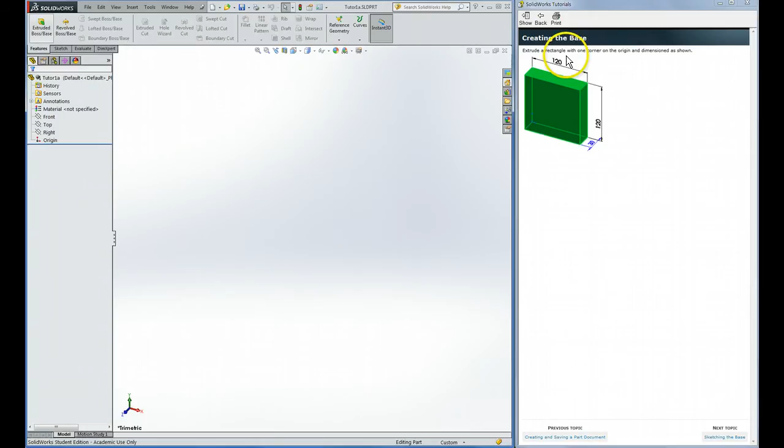So it asks us to do extrude a rectangle. If you already know how to do this, feel free to do that without following their instructions. Just go right to extruded base. That's good practice, but I'll follow the instructions.

Okay, so extruded. It asks us to click on the front plane. I'm just going to do that so I'm consistent with the rest of their instructions, but you can click on any plane to make a part. Front plane, and now we're set to that one.

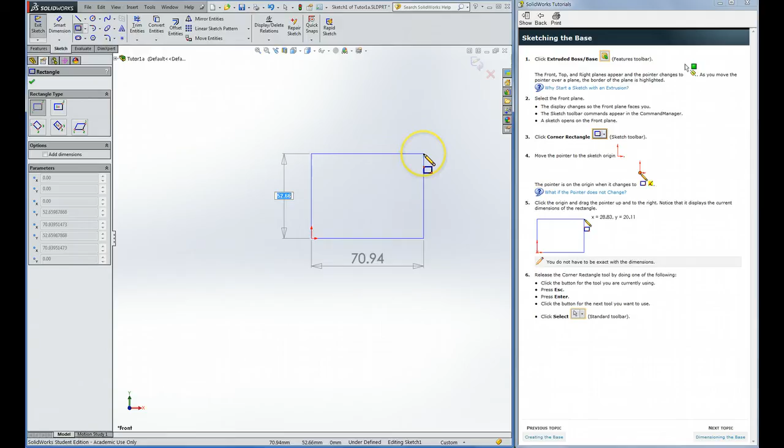Rectangles using corners. Okay, so you see the little blue, orange dot. That means it's locked on to the origin. And we'll just make any size rectangle. You can release by clicking the button on the tool you're using, press escape, that's how I usually do it, or press enter.

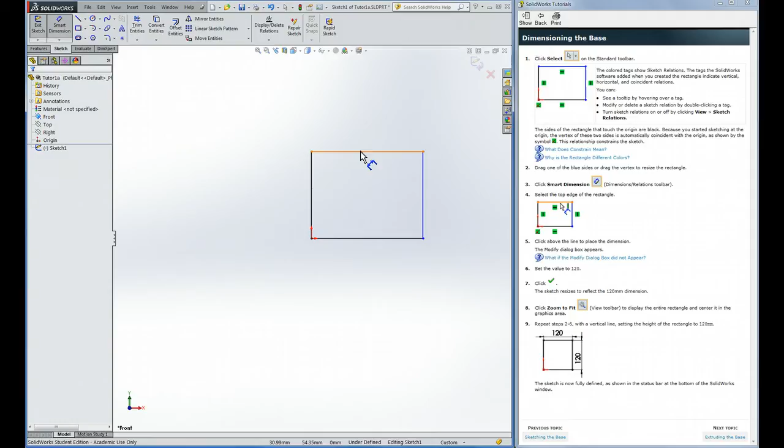Next, now we're selecting, it asks us to hit that on the standard toolbar, but it is already selected. So we're going to dimension this rectangle. I clicked Smart Dimension, and that is asked to be 120. So now I'm hitting enter instead of the green check, but it's fine to do either. It's ready to dimension another one with the mouse pointer looking like that, so I can click right there on that one. 120, enter. Now I've got my rectangle, and that's what it asks to do.

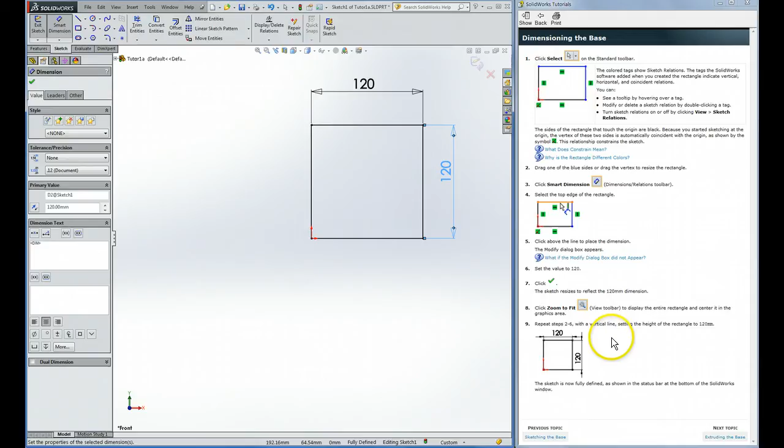Zoom to fit is often useful, that little button, or the F key. That fills the screen with it. You notice all the lines are black. That means they're fully defined. If you have blue lines, then something's not dimensioned yet.

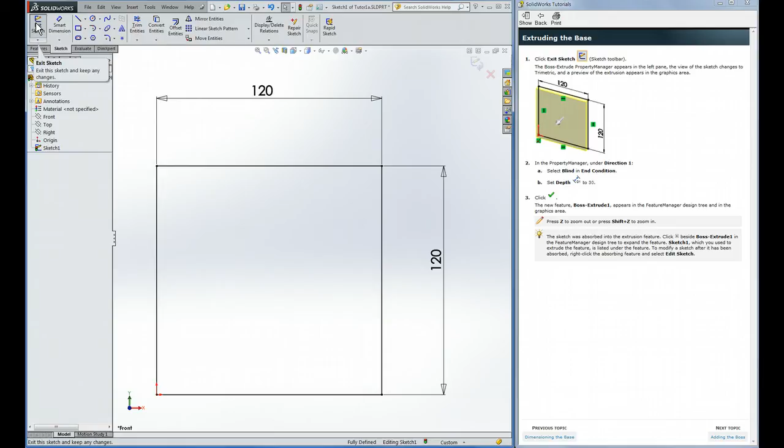Now we're going to extrude it. So we get out of the dimension. We hit the exit sketch to get out of this. And that puts us back into the boss extrude, or base or boss extrude. And now we need to set some conditions.

So first thing is the type of extrusion, or how far to go. The blind means it will just go a distance, and it won't account for any other features in the model. Often you'll do things like to a surface or mid-plane. Those are often helpful for more complex parts, but this one's just blind. And they want a depth of 30. So 30, enter, and check.

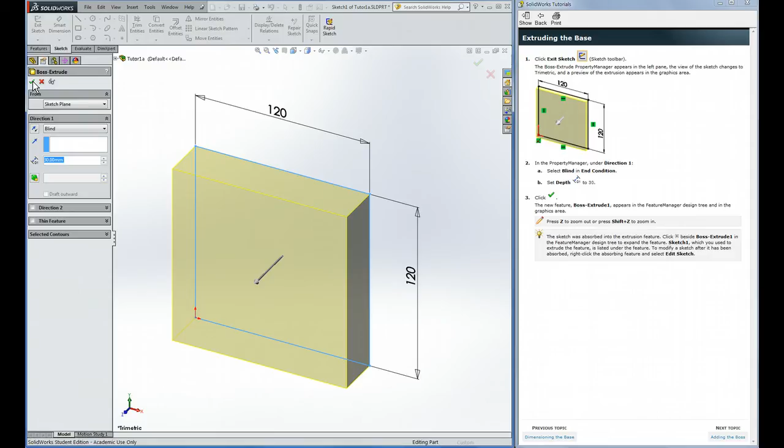Okay, it asks for Z for zooming in and out, or Shift Z, zooming in, Z for zoom out. Of course, the wheel does the same thing, the mouse wheel. Adding the boss.

Okay, so now we're going to add a boss on this base. So in terminology, usually you start with a base, and then anything that sticks out from that is called a boss. So a boss is just something that sticks out from a part.

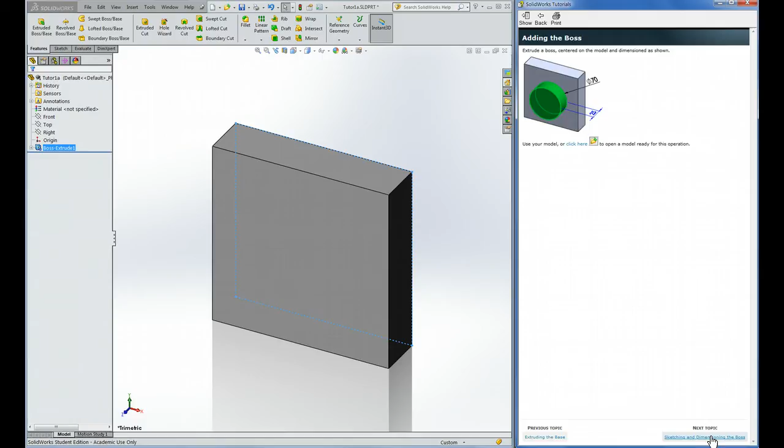Okay, extruded boss base. Now it's asking us for a plane that we want to make our sketch on. So we're going to use the front plane. Actually, they click the plane first. It doesn't really matter whether you click the boss first or the plane first, as long as you click both.

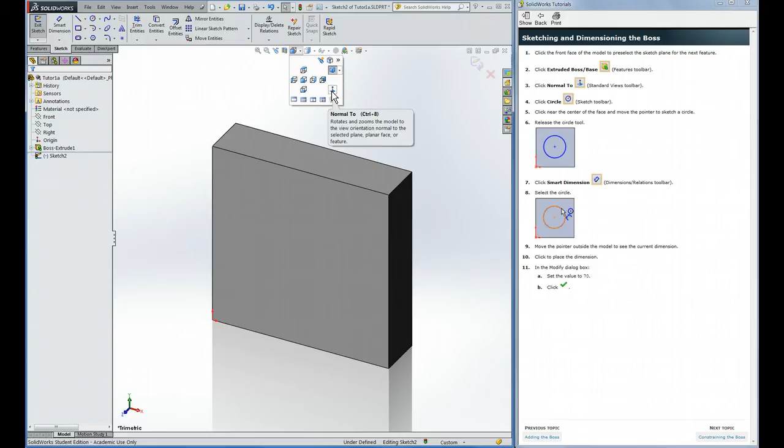And it asks for the normal to, so that's in the standard toolbar, that's right up here. Since it knows that we are working on this plane already, that's normal to, it's going to reorient the view so we're looking straight at it. And you don't have to do this, you can certainly sketch in an isometric view, but it's often more helpful to do it this way. Circle.

So they're suggesting that we put the circle near the center and then make our circle. I'll show you an alternate way.

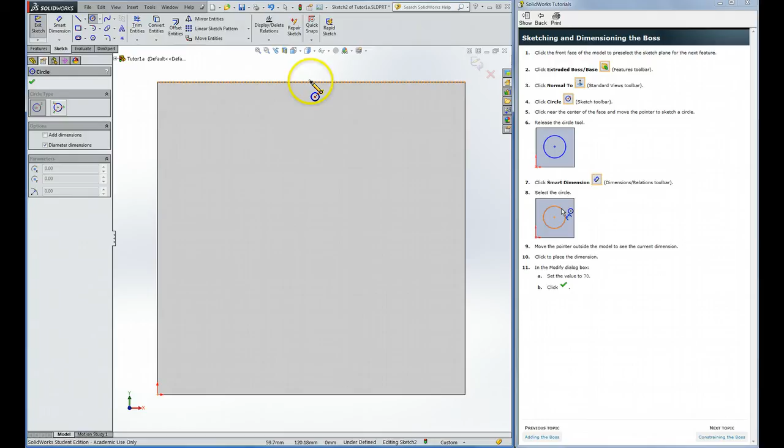It's a little slicker. Right now it doesn't know where the center is, but if I hover my mouse there, it finds the midpoint, and if I drag down, it knows to draw an inference line. Hover here, midpoint, inference line. And if I now hang out in the middle, it'll draw both inference lines.

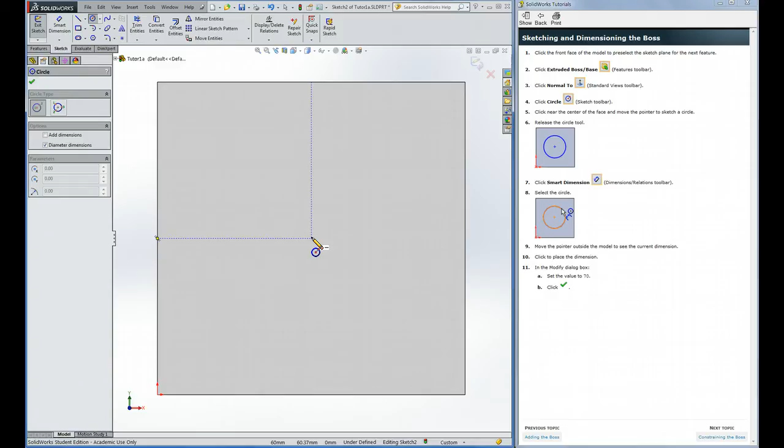The little symbol in white there to the right of the pencil means that this point is going to be formed by both of those inference lines. So you're guaranteed that it will be in the middle. So I'm going to click it here.

And it doesn't matter how big you make it, because we're going to dimension it. So we've made our circle. We can either get the green check, or we can hit enter, or probably escape.

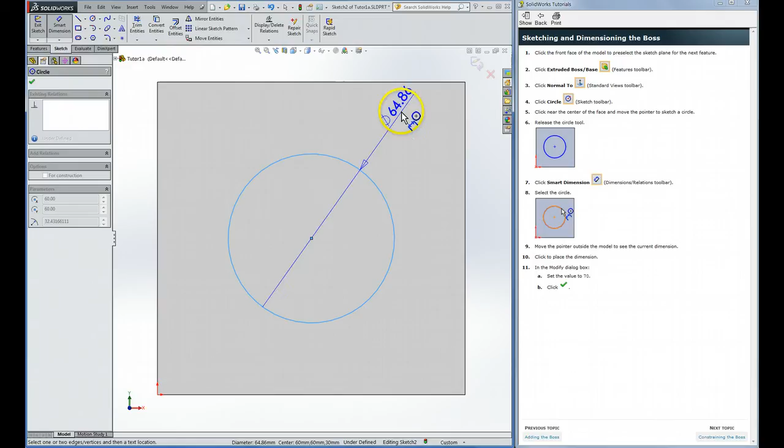And now we want to dimension this. Smart dimension. So here's how you dimension circles. This can be a little confusing. Circles are normally dimensioned - I'm going to zoom out a little bit - with the number outside the part at some kind of an angle. So that would be fine. Circles are not usually dimensioned like that. It's not wrong, but this would be the standard.

70 is the dimension, and I'm hitting enter. We can hit the green check or probably enter again.

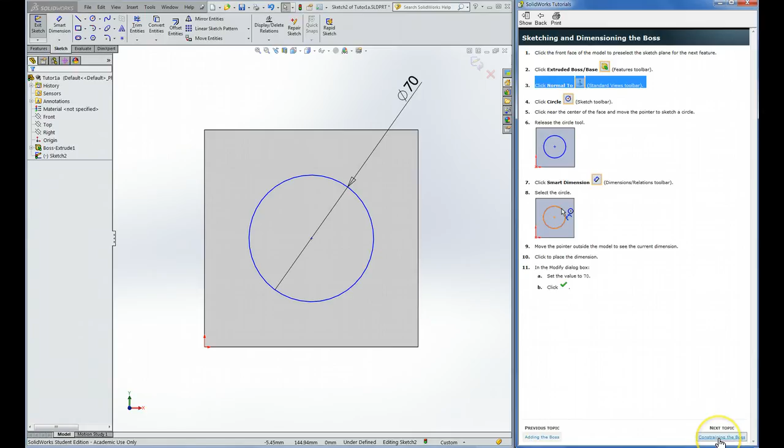Now, since we put it in the middle, we shouldn't have to do this step, but I'll go through it so you see how it works. Smart dimension. You have a couple options how you can dimension the location there.

You could click this top line. Now, if you click that, you might be confused because it thinks that you're dimensioning the length of that line. But if you also then immediately or next click the center, now it knows that you wanted to dimension from that line to the center.

I'm going to hit escape because I want to show you a different way. So if I click the point there, and then the point there, and then drag over here, now it's from point to point. So they're both fine ways to do it.

60, and that's already correct, so I'm just going to enter. And I'm also going to show you that it's ready for making a dimension because the mouse pointer has that little dimension symbol on it.

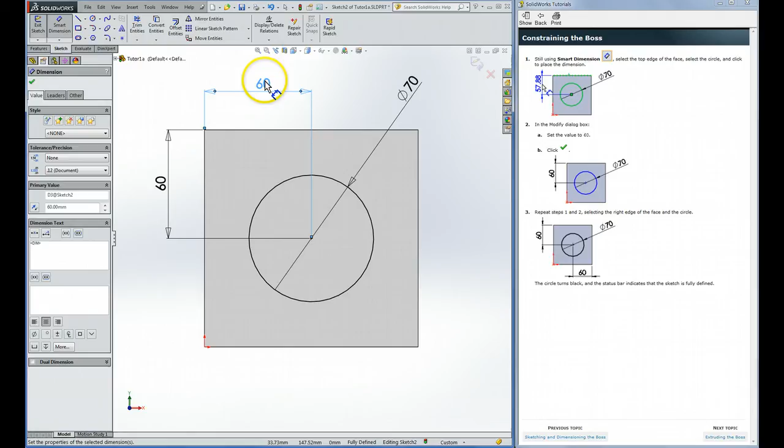So I'm going to do this the second way. Orange, orange, 60. And enter or green check. Okay, so now we have it dimensioned. And since it's in the middle, it didn't matter whether you did from that point or from the origin.

And we're done with that sketch, so we can exit it. And that kicks us back to the Boss Extrude PropertyManager. And now we have to tell it what we want this boss to look like.

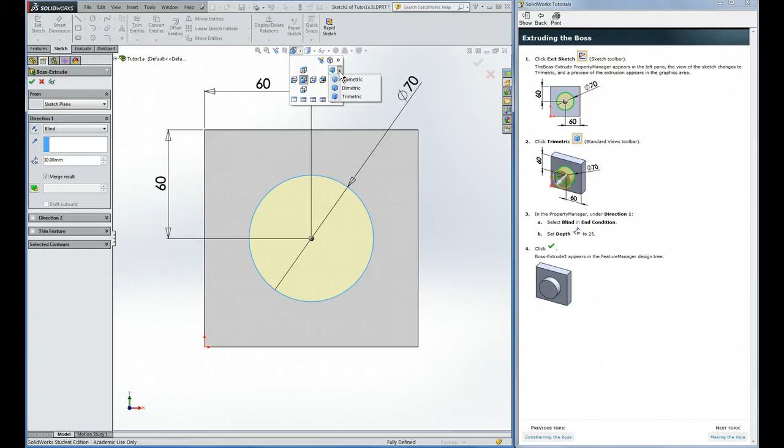So it tells us to go to the trimetric view. You can access that here, which is there. And you notice there's a bunch - isometric, don't worry about which one. It really doesn't matter for our purposes. You can also, of course, click the middle mouse button and get any kind of angle you want there.

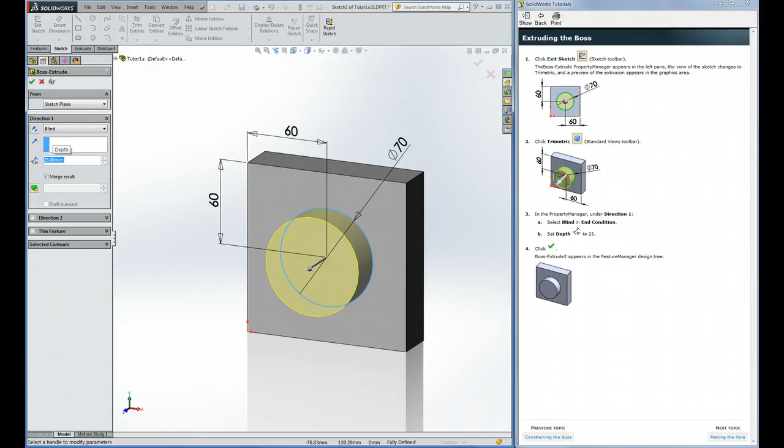So this one is a blind end condition and a depth of 25. Blind 25. Enter. And check. Okay, so there's boss extrude for the base, and there's boss extrude for the boss.

Now we're going to make a hole down the center of the part, and you can see that the wall thickness of this remaining piece is going to be 10. So we'll learn how to do that kind of a dimension.

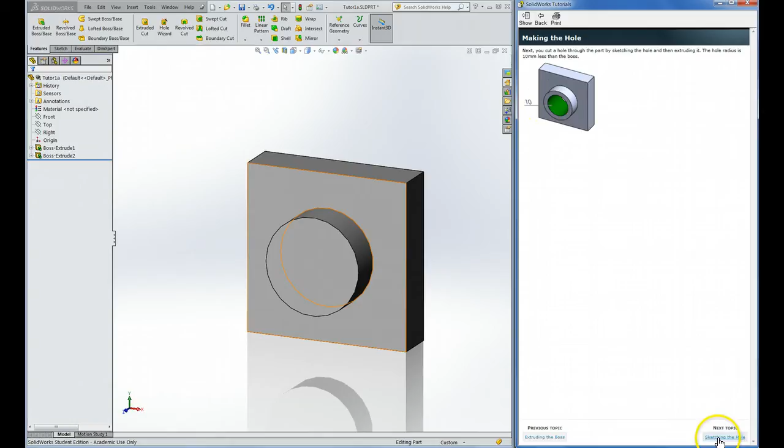Okay, so now we're making a cut. This is an extrusion, but it's a cut instead of a boss. I click that, and now it wants to know, what face do you want to sketch on? Well, that's the face I want. Click there. It suggests we use the Normal To.

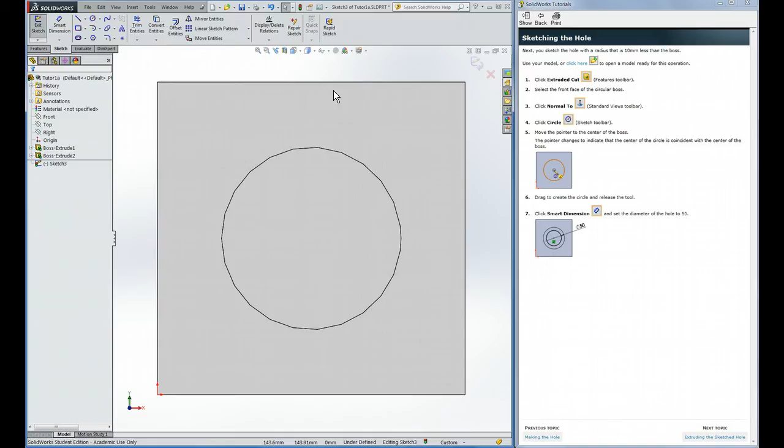And there we are. Click the circle. And once again, it doesn't know where the center is because we haven't told it what we're interested in. If I hover my mouse around the edge, now it knows I'm interested in that circle and its center. And sure enough, there it is.

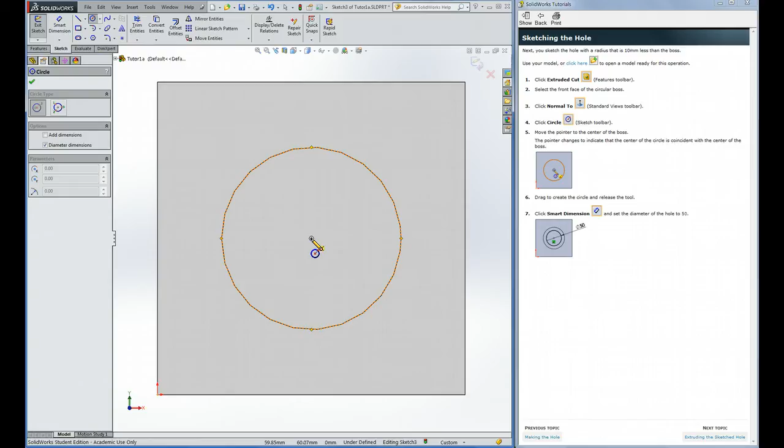So notice when the mouse approaches the middle, see the little green, yellow symbol to the bottom right? That indicates that it will lock on to that middle point. Even if you're not exactly on the middle point with your mouse pointer, it's going to lock onto the center. So click there. And for size, it's going to end up being 50.

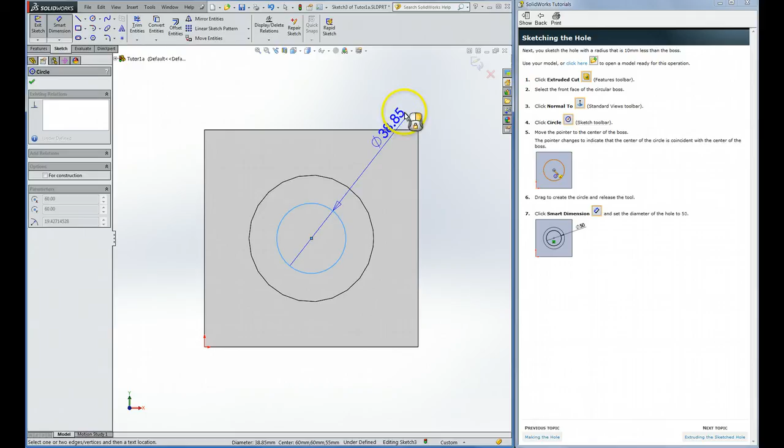I find it preferable to not try to hit it exactly at 50, and I'll show you why. Click it there, and we're going to dimension that, then type in 50. The reason I don't like to manually do it is that once I hit this 50, I can see the circle change, and that confirms to me that it understood the command. Very minor deal, either way is fine.

Okay, and we're done with the dimension, and we're ready to exit the sketch. Let's see, now it's saying to go back to trimetric, so let's do that.

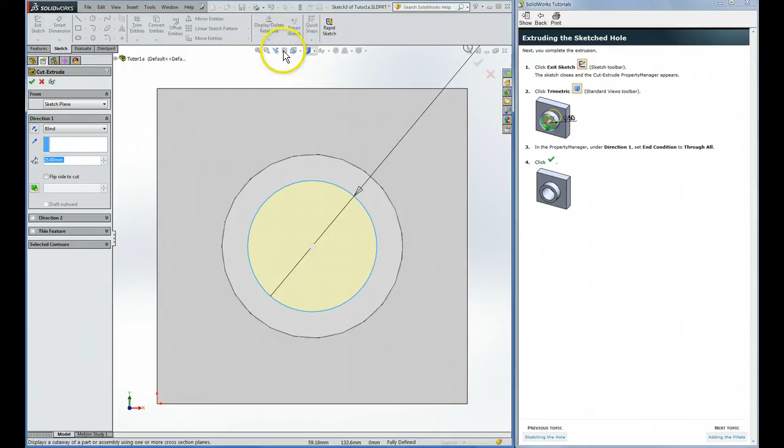So there's the cut. Now this is a different kind of cut. We have some different end conditions. In Property Manager, under Direction 1, set end condition to through all. So here we have blind, we have through all. This means blind will just go a distance, through all means it's going to go through the entire part, and that's often what you want. It's also sometimes helpful to go to next, meaning the next plane that it sees, or again, mid-plane is sometimes helpful. So through all, and now you don't have to specify a depth because it's the whole thing.

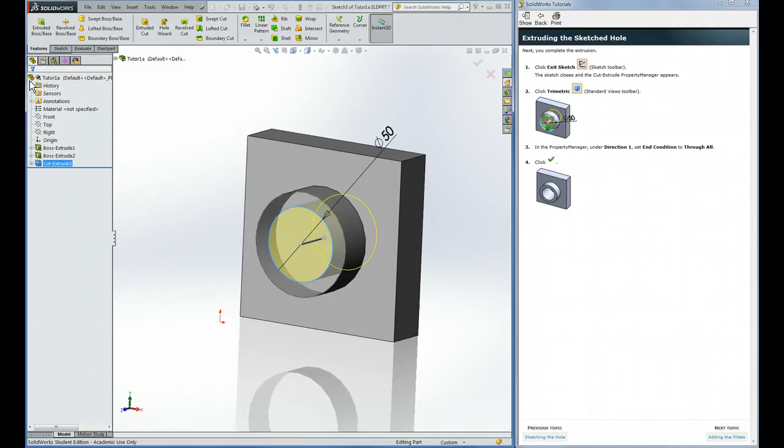And check, you can always hit enter for check. And now you see we have a hole through the middle of the part, and that wall thickness is 10 millimeters from there to there.

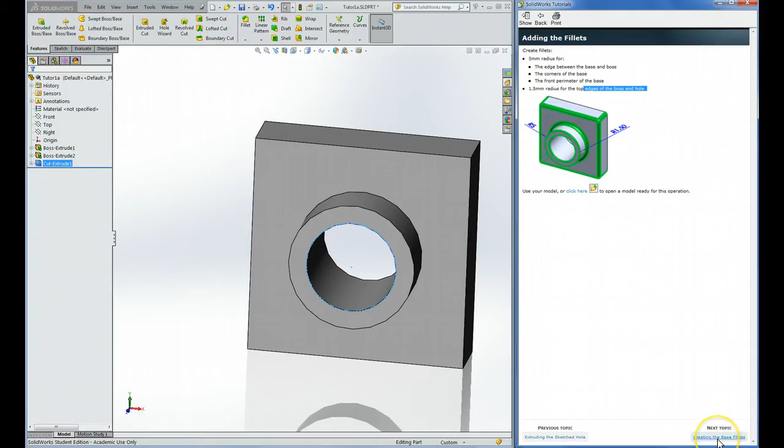Okay, so let's do this. So we click the fillet command, that's right here. And we have a slightly different version than what they said. Constant size is not one of our options, so that's fine, just ignore it.

It says select the front face of the base, so I'm clicking there. And you can see once I select that front face, it has interpreted that to find all edges that are on that face. And sure enough, those are the edges we want to do. We want a 5 millimeter radius there, so I'm going to go to there and click 5. You can see in the blue box is always important - that's what has been selected to fillet, or the things that are associated with that.

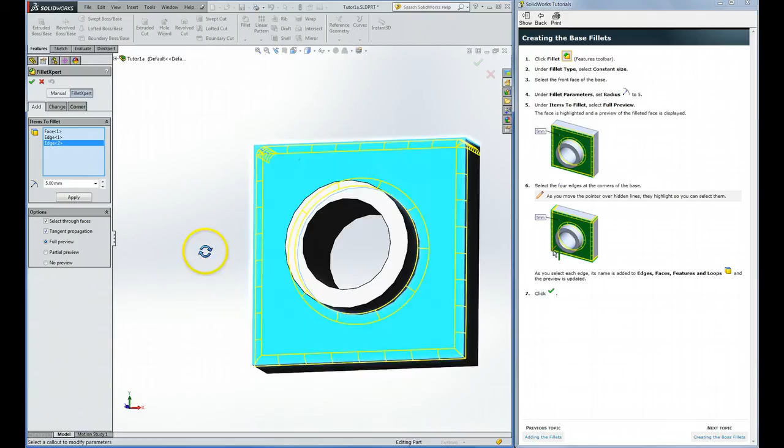Okay, let's see, we're going to also select the 4 edges at the corners of the base. So that would be here, and here, and you don't hold shift or control for these - it's expecting just you to keep adding them. Now I'm using the middle mouse button to reorient the part. There, and there. And you can see we have face 1 and we have 4 edges.

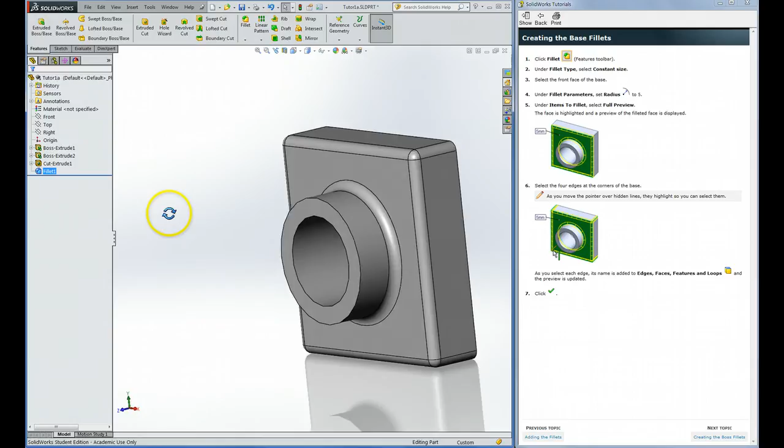Let's see, and that's good. And now we hit our check, and we'll see what it really looks like. Okay, yours might not look exactly like that, depending on your display style. See, I have shaded with edges, and there's shaded. So if yours look like that, that's all the difference that it is.

Okay, now we're going to create the fillets on the boss, so that's this one and this one. So now we'll click fillet again. And the radius is supposed to be 1.5 for this one, so we'll enter that, 1.5, enter.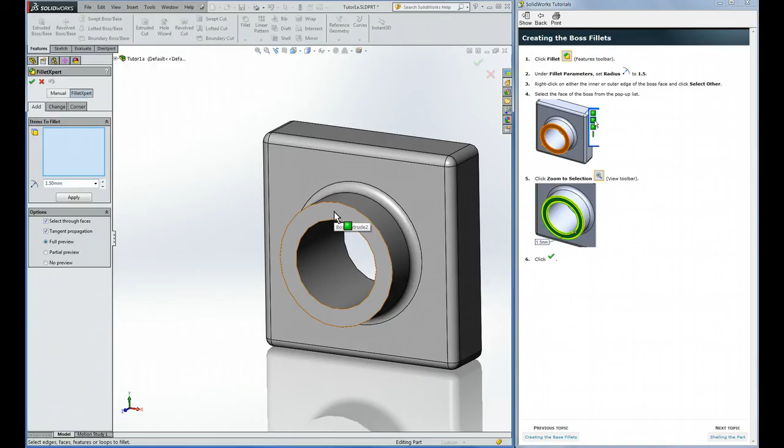The blue box means it's looking for where you want it. If I click that face right there, it found them, and they give some different instructions here. I think this is for the older version, the right click, because that did not work when I practiced it. And this little guy, I don't think I got that pop-up when I practiced it, but this works just fine now. So in the new version, that's the way to do it.

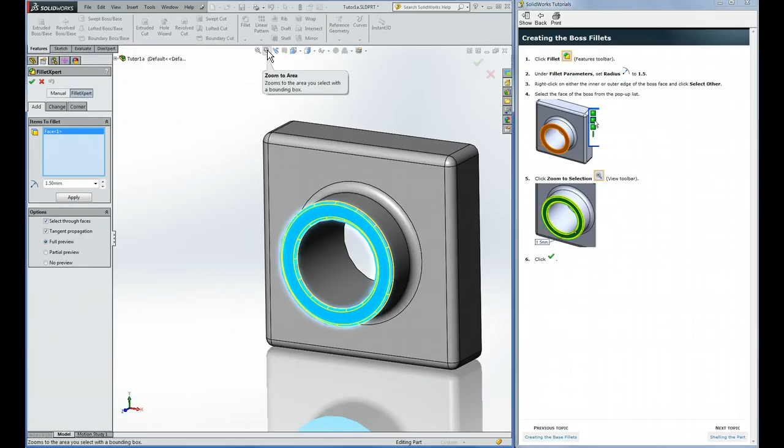They suggest using zoom to selection on the view toolbar. And let's see, we don't exactly have that one here because the view toolbar is not exactly shown. That would be the closest - you would click and drag to come in on that. Not that important, of course.

I click the check, and now we're going to shell the part. So I'm going to zoom out. You can just say F, that's the best way.

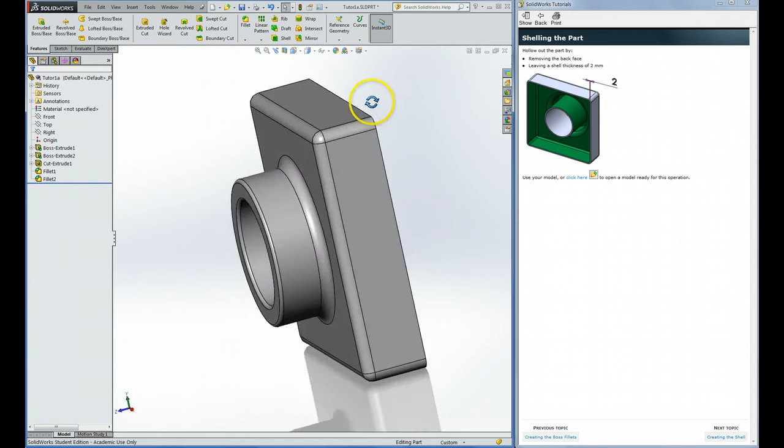Now let's look at shell. A shell means we're hollowing out the part. Right now it's solid, and that's a lot of material. If you want to save cost and weight, we can make it a hollow part and still have the same shape and often just as good of a function, but lighter. This is going to be a 2 millimeter thick shell throughout. Let's see how to do this.

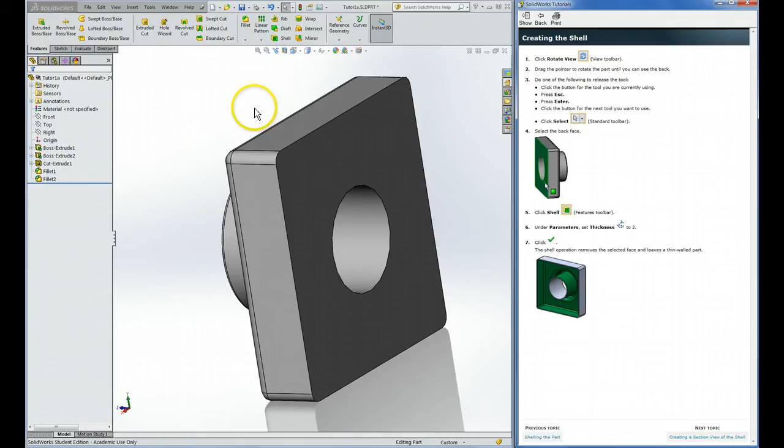They suggest using rotate view, but I think it's easiest just to use the middle mouse button. Sometimes it can take some practice to get used to how to use that middle mouse button, and your part can kind of get into weird orientations like this and you don't know how to fix it.

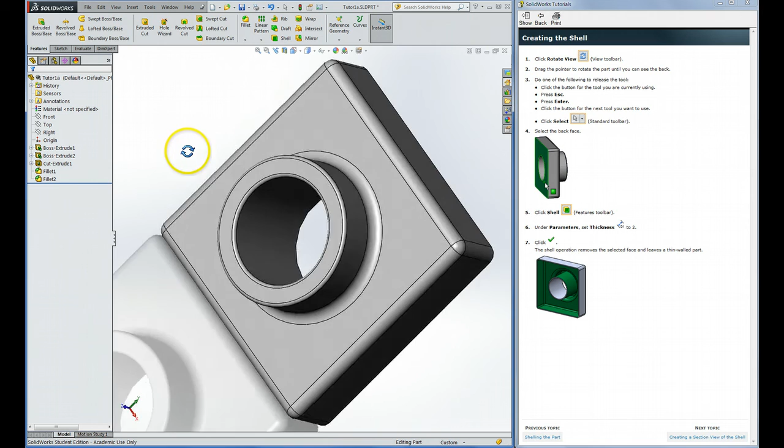So here's a little trick. If you're in that orientation and you want to make it square using the middle mouse, click down with the middle mouse, and watch what happens when I just take the mouse and go in a little circle. See how it's rotating the part on me? Now let me rotate in another circle the other way. Now it's rotating back. That's something your hand will get used to doing intuitively to get the part to the orientation you want. Alternatively, you can just hit F, and that will put it in the good view as well.

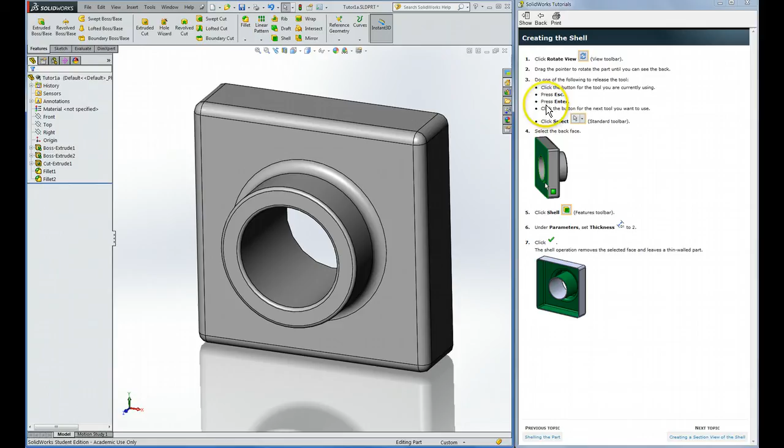Okay, so back to where we were. Select on the standard toolbar, it's already selected. Select the back face, so they're having us click the face. In general, on these commands, you can either click the command first and then the face you're working on, or click the face first and then the command. In most cases it doesn't matter. Okay, so here's the shell command.

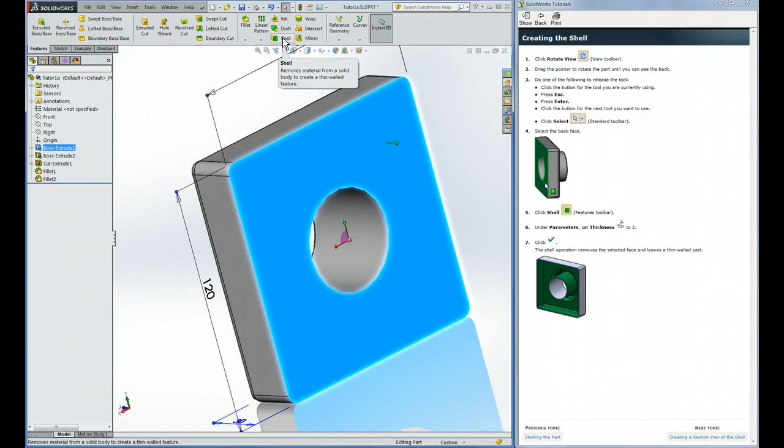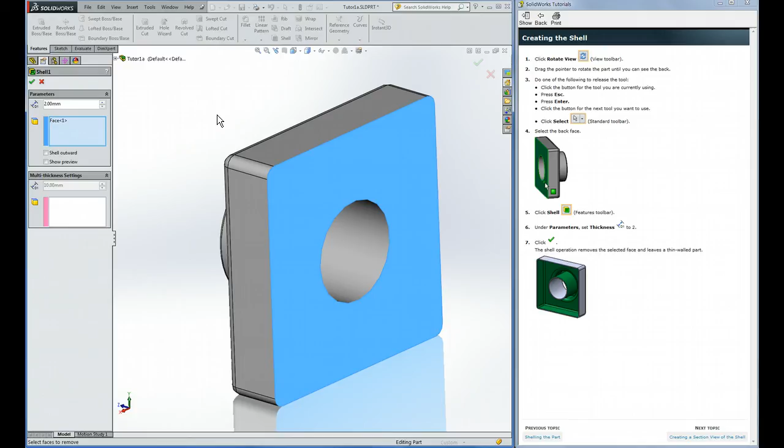And for parameters, we want to set the thickness to 2. So that's right here, 2, enter. Now you might be thinking, how does it know to make the shell just by clicking that back face? The logic is that it's going to start at this face, remove it, and move into the part, continuing until it hits other faces.

And when it hits those other faces, it will come back 2 millimeters and leave a shell. So we're done with the shell, we click check, and there it is. That's what it did. It starts at that face and then pushes its way to other surfaces, and now we have a part that is everywhere you look 2 millimeters thick.

Okay, now next is to look at this part using a section view. Section views are very powerful in engineering because they give a lot of good information about how the part is designed. So they ask for a trimetric view, but you can use any view you want. I'll put it in a similar orientation to theirs.

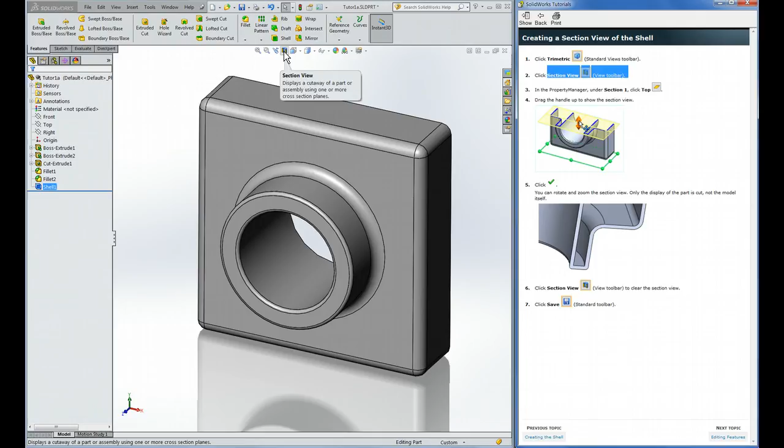In the Property Manager, click Section View. That's in the View toolbar, right there. Once I click it, notice it's now grayed out. That's because the view is being controlled by this, the Section View control. We're clicking on top for Section 1. You see these three choices: front, top, and right. So click on top. Now you think, well, I can't see a thing.

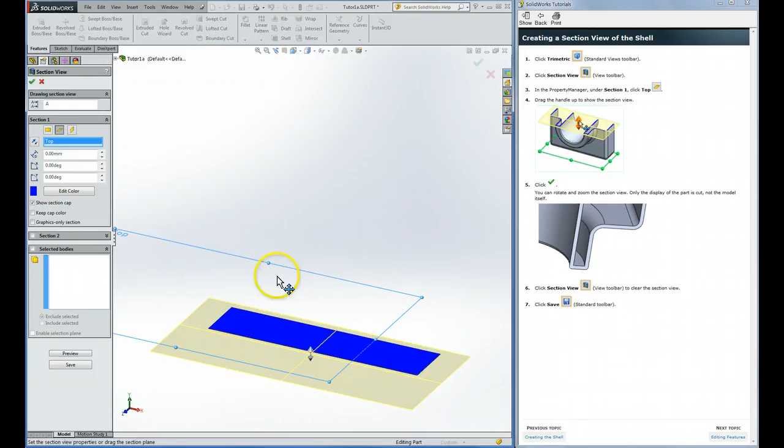Well, that's because this little handle needs to be dragged up. As I drag that handle up, you can see the cross-section of the part all the way through. This gives the engineer a lot of information about how that part will interact with other parts.

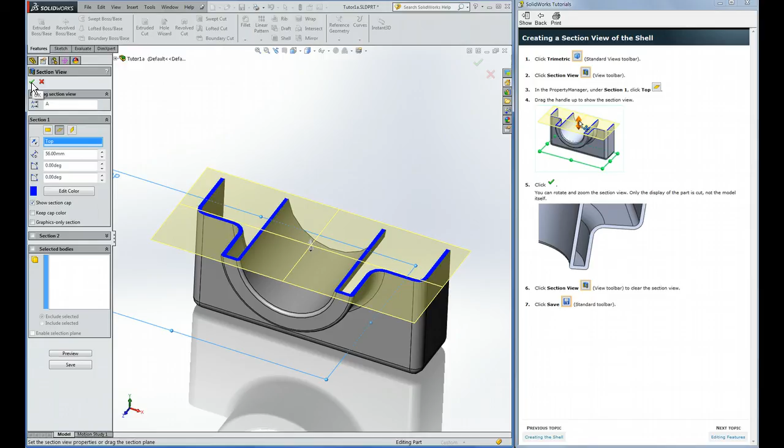Okay, and if you're happy with that section, you would click the green check. I'll follow the instructions here, and of course it's leaving it in the section view. If you want to get out of section view, see how it's gray? Just click it, and now we have the part back. It suggests we save, which is a good idea.

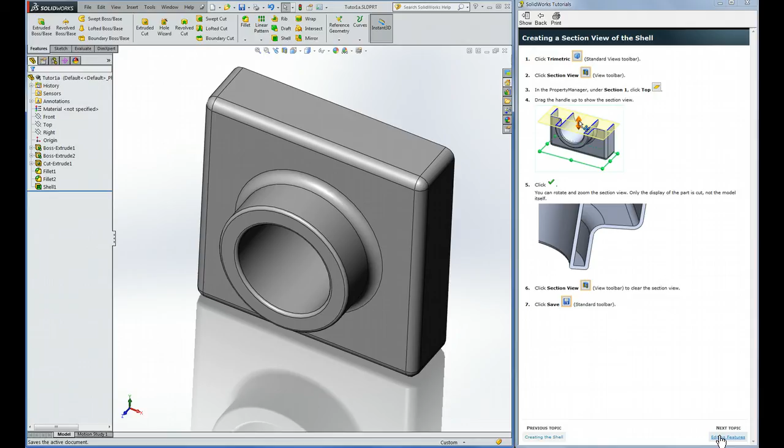Okay, editing features. Parametric design means that you design a part according to parameters. This is different than traditional two-dimensional CAD or any other kind of CAD that is direct modeling. All the dimensions we entered can be changed, and it will redesign the part based on those changes. That's called parametric modeling. This is a very powerful feature because engineers design something and then very soon realize they need to change something. This prevents you from having to redraw the whole part. You just change the feature and the computer redraws the part for you.

So we're going to do some changes. We're going to increase the depth, change the type of fillets or the dimensions of them, and recreate some of the fillets. Okay, so editing the base features.

So it asks us to double click the boss extrude in the feature manager tree. This is our design tree, this is all of the things that we've done. Remember, we started with the base, then we did the boss, then the cut, then those fillets, the smaller fillets, and the shell. It does these in order, and that order is actually important, as we'll see.

So we're going to double click this one. This is a quick way of editing. Just double click the feature, and now those dimensions that you entered before are accessible right here. You don't have to go into the sketch or into the controls.

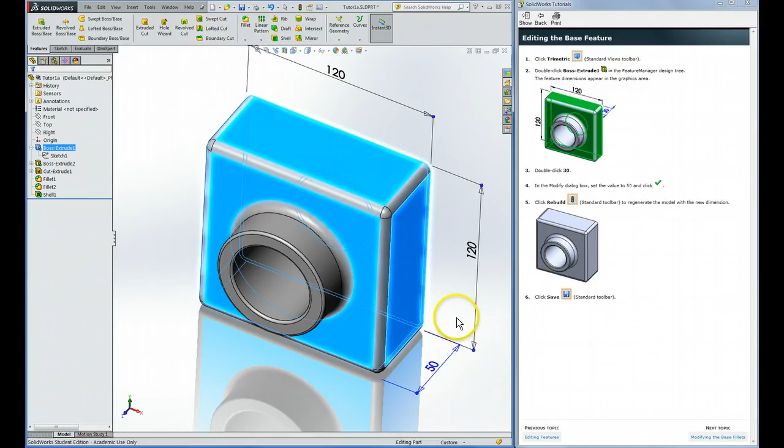It wants us to change the 30 to a 50. So I click that and 50, enter, and there it is. It's redesigned the part just by changing one number. In traditional two-dimensional CAD or even regular traditional solid modeling, that could be a lot of work to do just that one change. So now we're going to click rebuild. Rebuild is a good command to see if the model is still valid based on the changes you made. And it is, it did not give me an error.

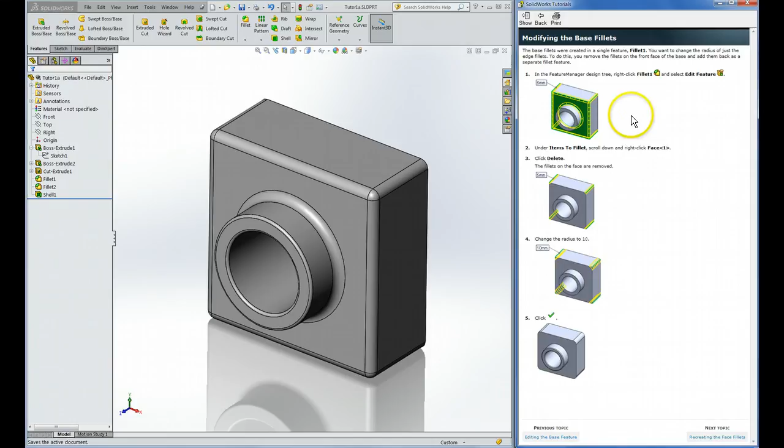Save. Okay, now we're going to change the type of fillets. So originally we had 5mm fillets for all of these features. It wants us to change the face fillets, first get rid of them, change the sides to 10, and then we're going to redo the face later.

Okay, so we're going to right click on fillet one and edit feature. This is something we do a lot when you want to edit something. So I'm on fillet one, right clicking, and then go here to edit feature. The commands typically used on this right click are this one most of all, sometimes delete, suppress you'll use later, and hide you'll use later. And most of the other ones we don't use much. So there we are, edit feature, left click.

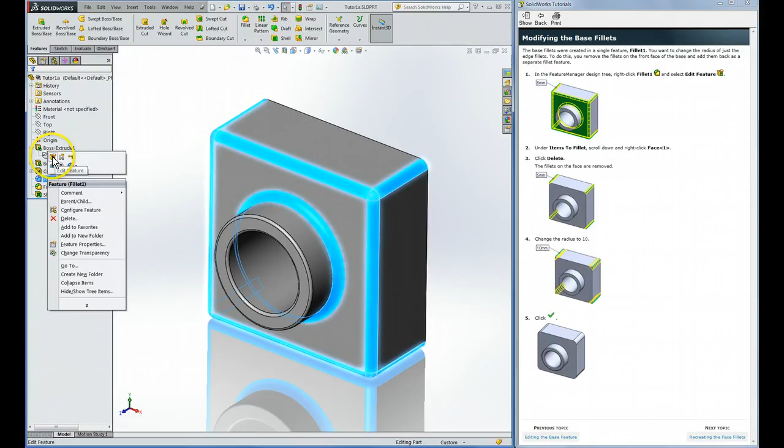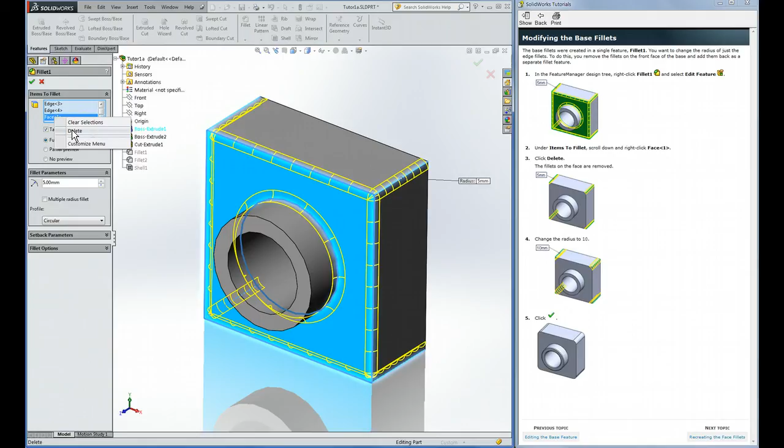Okay, and now it brought up that same fillet control that we had before. You can see it has, this is a small window, but there's more information in it. I'm going to click the little scroll up and scroll down. Here's face 1, and there's the edges around the side. So let's scroll down, right click face 1, and hit delete. There it is. Right click on that, delete. And now we just have the edges on the side.

We want to change the radius of those to 10. Okay, so let's do that. 10, enter, and then the green check. So fantastic, this is the beauty of parametric modeling, that it has redesigned the part for us just by a few choices. If this were traditional CAD, that could have taken me 10 minutes.

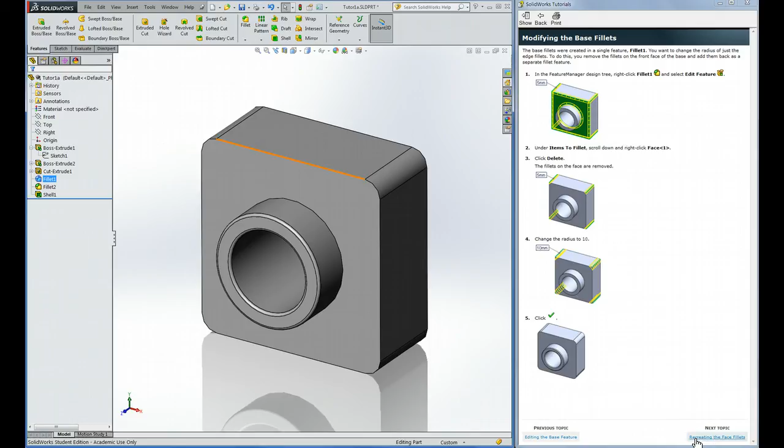All right, let's go recreate the face fillets. Okay, now this is showing the effect of order on your parts. So what it's asking us to do is place the pointer over the rollback bar, that's right here, the little blue bar at the bottom. Wherever the blue bar is is where new features will be added. It wants us to undo the shell feature because we want to put the fillet feature before it. I'll explain why later.

So if I drag that up, that's what it's asking me to do. Now you see the shell is grayed out, it's in a sense suppressed. It hasn't forgotten about it completely, but it's not using it to create the geometry. And if I look at the back, it's solid. Okay, so I can easily get it back by just dragging that back down. Now it is shelled, and now it is hollow. Okay, so we'll drag it back up.

So we've done this step, and the reason for doing this is we want to add a fillet before the shell feature. This is not the only way to do it, but it's a good way to do it. So by putting the blue bar here, that's where the new feature will be added, and then the part will be shelled. I'll show the difference later. So click fillet.

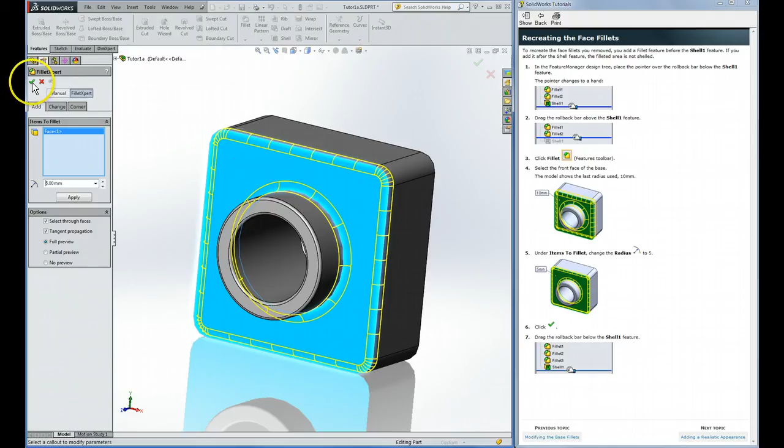All right, and click the front face of the model again. There, it's now selected in the blue box. And we want a radius of 5 there. Okay, so 5, enter. And we're good, so click the green check, or enter. And now we bring the shell back down.

Okay, so let me show you the difference between the effect of order. And the best way to see it is by doing a cross section. So back to section view.

You don't have to do this with me, but I want to show you why the order matters. Right now, this is what you might think is logical. The shell feature is working to keep the thickness of the part the same right through that radius, for example, right there.

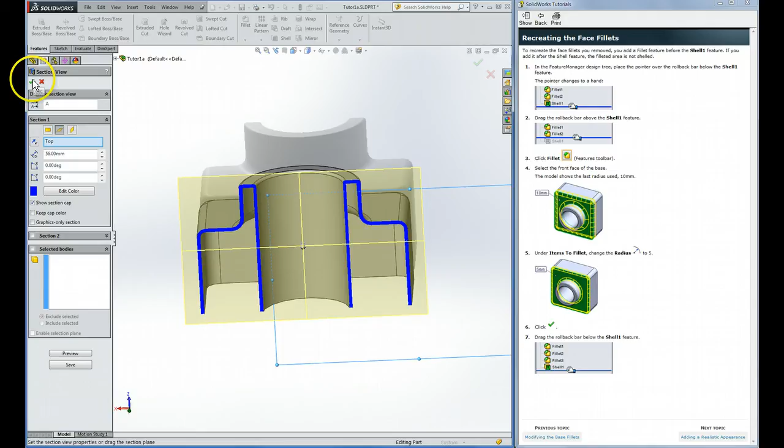Let me leave this on, so I'm going to hit the green check. We can undo it later. I'm going to take this fillet feature and move it. I'm just left clicking on it and dragging it so that the little arrow is below the shell. And look at the different geometry that you get.

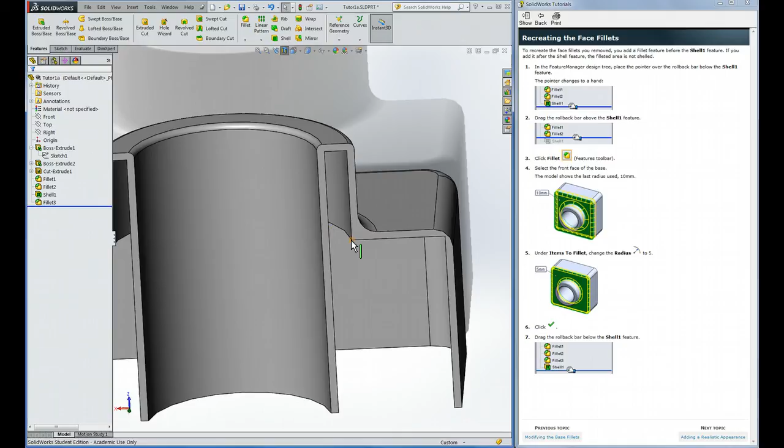So let's think why that's true. Let me eliminate the fillet by dragging up. If you do this fillet, the outer borders, this fillet, the top, and then you shell, you will get this shape with sharp corners there and a sharp corner there. If you then add the fillet after the fact, it will fill in that right there, but it will leave the sharp corner because you've already done the shell in a prior step.

So that is different than doing the shell after the step. Now it does the fillet first, then it shells it. So order does matter when you do the CAD work.

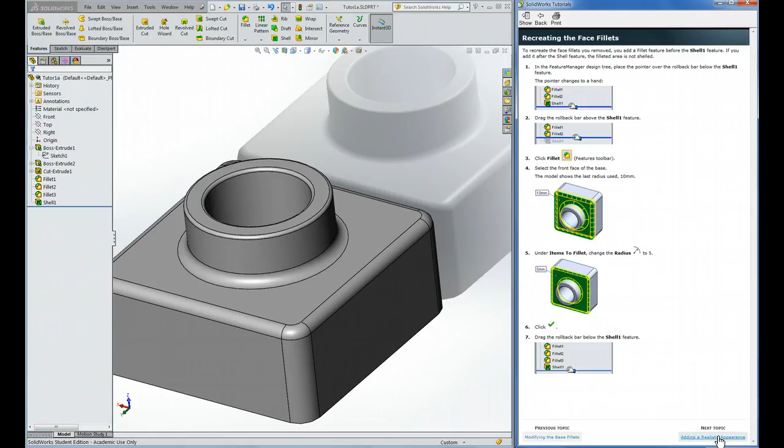Okay, so now I'm going to get rid of the section view by clicking that. Let's see, we're done with all that. And the last thing is to change its appearance. So you can see we have a kind of a chrome look here.

It wants us to click Shade in the View toolbar. I think we're already there. Well, we've got these little lines. Those are not realistic. They're helpful for viewing it, but that's more what it would actually look like. I'm going to hit F to put it in the middle of my model. Of course, this is a reflection.

It's somewhat helpful to show you the backside. It's mostly to make it look real. And we want to select Real View Graphics in the View toolbar. This may be a little hard to find. It's under here, and you can see it is already selected. It's boxed, so I don't want to click it again because that would undo it.

So we do have Real View Graphics on. And now we want to select the part name at the top of the design tree. The reason for doing this: we're about to change the appearance, and it needs to know what portions of the part you want to change. If you want to do everything in the part, then select the whole part. So that's what clicking up there and selecting that will do.

Now it wants us to click Edit Material on the Standard toolbar. That may or may not be directly visible on yours, and we may need to bring up a new toolbar. So let's do that. Hover your mouse over the empty space and right click. This brings up all of the toolbars that SolidWorks can do.

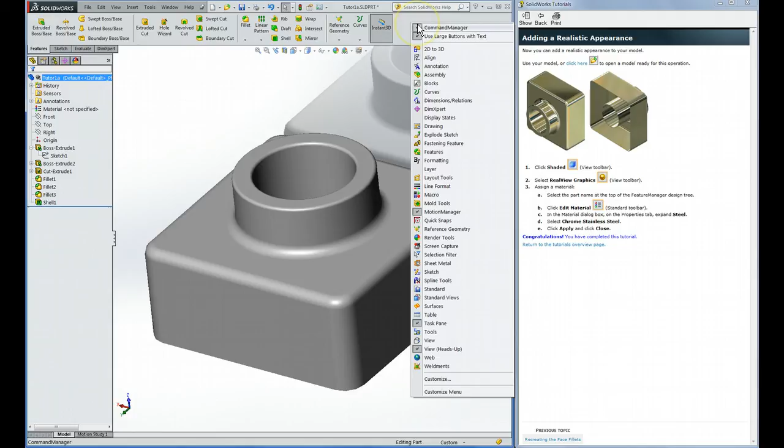So we have a few selected already. You can see the Motion Manager. We won't use that, but that's down here at the bottom left. We have the Task Pane. I believe that's the one that would be behind here. And the Heads Up toolbar, that's the one here.

So we want to select the Standard toolbar. Okay, so it's right there, and it put it right here. And so to find the Edit Material icon, I have to click the little arrow. And there it is, Edit Material. Okay, I'm going to drag this over to the right so we can see what we're doing.

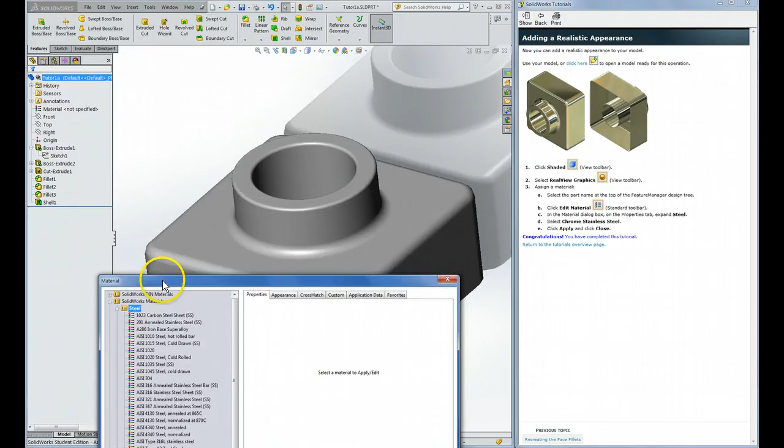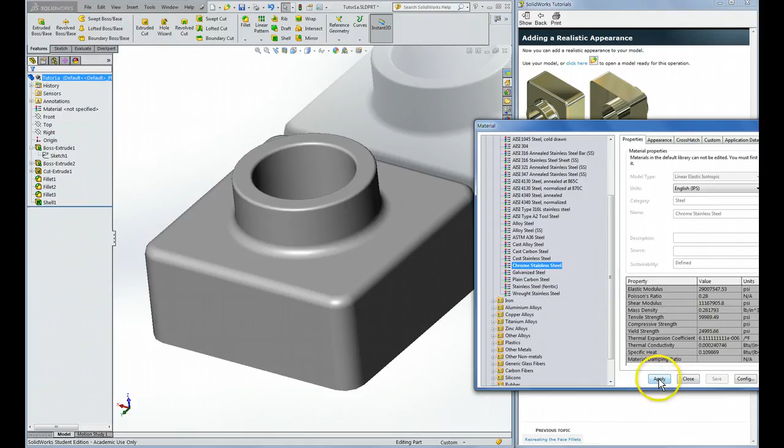Put it right there. It wants us to use chrome stainless steel. So scrolling here, these are the steels, and it's already opened. If yours didn't open, you might have gotten that. So you'd say SolidWorks Material, Steel, and Chrome Stainless Steel. Then I'm going to drag this up so I can click the button, click Apply, and you can see now we have a chrome stainless steel appearance.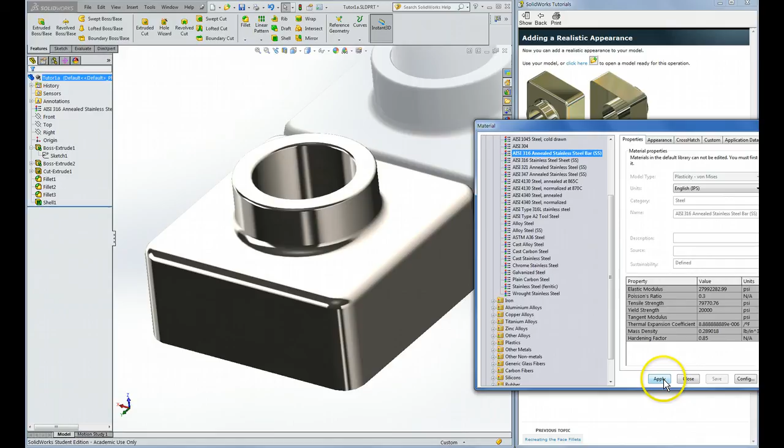If you want to try different materials, you're welcome to do so. Here's a cast steel, Apply. It has a rough appearance from the mold. Now galvanized steel — that looks like a tin roof. A lot of these are kind of just colors, so if you want some cool looking ones, go to the coppers. There's beryllium copper and regular copper and so on. But I'll take it back to chrome stainless.

Okay, and we'll close that. And that is this part of the tutorial.